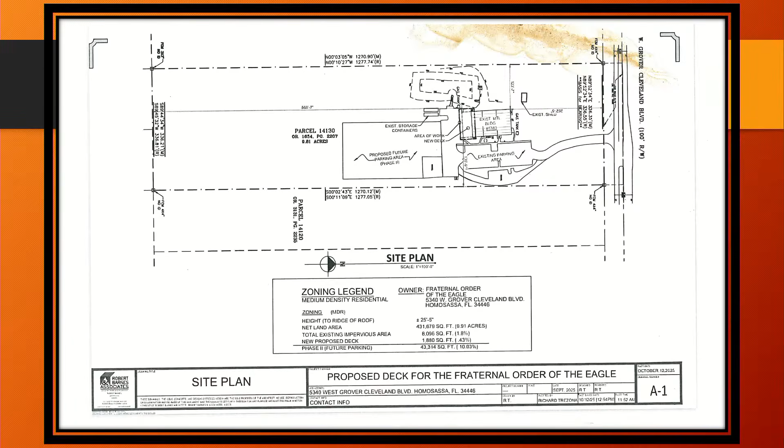Thank you. Okay, the applicant, if you can please come forward and state your name and address for the record, and then you can make your presentation. Dennis Karcher, 5011 South Pastel Point, Homosassa.

This is for the Eagles Club. We need a bigger parking lot, and that's what we're here for. Mother's Day, Father's Day, Christmas, Thanksgiving, we give free dinners out to needy people, and that's the time we need the extra parking. So we're really looking forward to the parking lot, and then hopefully we can put a deck on there.

Now, can I answer the lady's concerns, or does that go at another time? Yes, so we did have a letter from somebody. This is an appropriate time to answer. Yes, you can respond to those concerns.

Her concerns, one of the things she says is the parking lot, and that's what we're here for, number one. And then she says noise. I've been going there 6 years, and I've never heard noise coming out of the building. The best thing is on a Friday night, we have one person come and sing. We're all over 70 years old. We play songs, a little oldies, maybe a little country. But I've never heard noise, because when I'm in the parking lot talking to somebody, I can hear the road noise, but never noise coming out of the building. They all want to come there and talk about Medicare, it's not like there's loud noise.

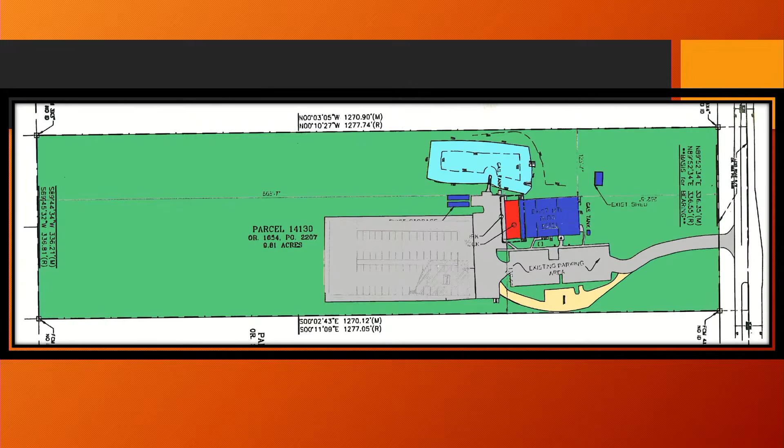Here is the site plan as proposed. You can see in red, that is the deck area proposed, and to the left there's some existing parking, but the big gray area is the proposed parking they want to add. The Crystal River Eagles Aerie was originally approved in 2003 for this use in the medium-density residential district. There was an update in 2013 which allowed an expansion to the building, which has since been permitted. So this request is to allow for the modification for the deck and the additional parking.

So this proposed use does appear to be compatible with the comprehensive plan, and as long as the conditions are followed if approved, it would be consistent with the land development code. Since this is a non-residential use, they will have to meet all the standards for small non-residential design criteria for any additions - parking lot, landscape buffers, and all that kind of stuff. Do you have any questions?

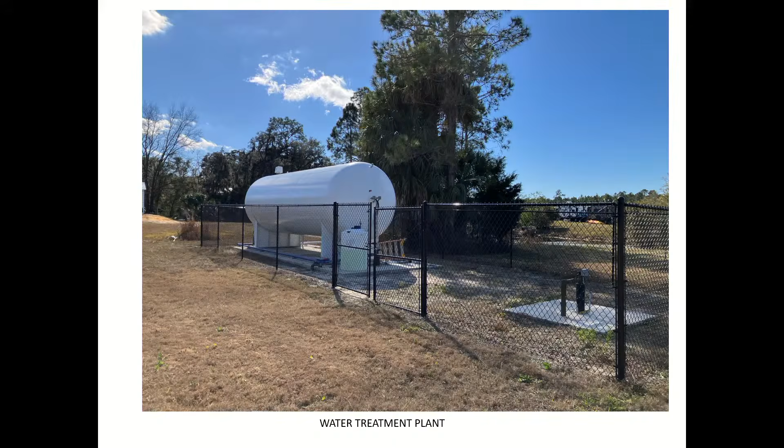That's the end. Okay, thank you.

So there have been two minor revisions to the master plan. The first was for a modification of the parking area on the clubhouse to allow for the golf carts. Also to add an entrance gate, to create a vehicle turnaround outside of the entrance gate, and to reconfigure the recreational facilities. The second minor modification was to add a maintenance building, which you've seen a picture of that.

Start with staff. Does staff have any questions of the applicant? Yes, ma'am. Mr. Furman, are you familiar with the conditions that are listed in the staff report, and do you have any issues with those? Yes, no, they're fine. I think that was my only question.

Okay, thank you. Questions by the board? Mr. Bozeman? I'm sorry. I've got a few. So you want to change the phase 3 from 55 cabins, eliminate, and then go to 213 RV sites, just to be clear. Yes, sir. What's driving that? Economics? Well, Steve Ponticos can tell you more about that.

For sure. When we first designed Stillwater, we bought the property in 2003. Excuse Mr.

Can you state your full name for the record? Steve Ponticos. I've been a Citrus County resident for over 50 years.

When we bought the property in 2003, we were going to build a land development. We were familiar since we helped develop Sugar Mill Woods. We found that piece, it was a preserve, actually advertised as Homosassa Preserve, 167.9 acres.

So we bought it with the idea of building homes. The recession and collapse in 2008 changed our thinking. We land banked it, and in 2012 we came up with the idea through my son to look at possibly doing an RV resort. We studied it.

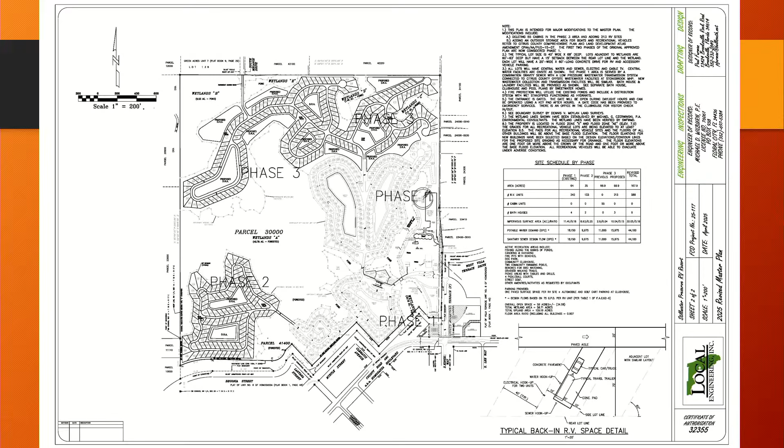So that's the answer I was looking for. I wanted to know how deep it was, how much water was there, if there's a Plan B, if there's enough to put it out. The fire marshals who came out there were right on top of it. They were impressed with the flow of the water and didn't have any questions. They used it as a training exercise. I respect that, but what I was saying is you don't have any additional fire protection that you're going to add for 213 RV spots. You haven't indicated that you needed more fire protection out there, double the size of your RVs, and that's what I was trying to get to. I don't have any further questions, madam.

Okay. Did you have any questions, Mr. Dixon? No. Okay, Mr. Stone.

I guess I would like to comment that if Richard thinks we need a soil analysis, I know that you can do a whole lot better than just fill dirt. You can give an exact composition of what that material is, whether it's sand, clay, the organic content, the granular distribution on it. If Richard really needs that, that can be made available. No, I wasn't looking for that, I was just looking for an answer. I seen the answers in the packet, I just wanted to hear the answers with my ears.

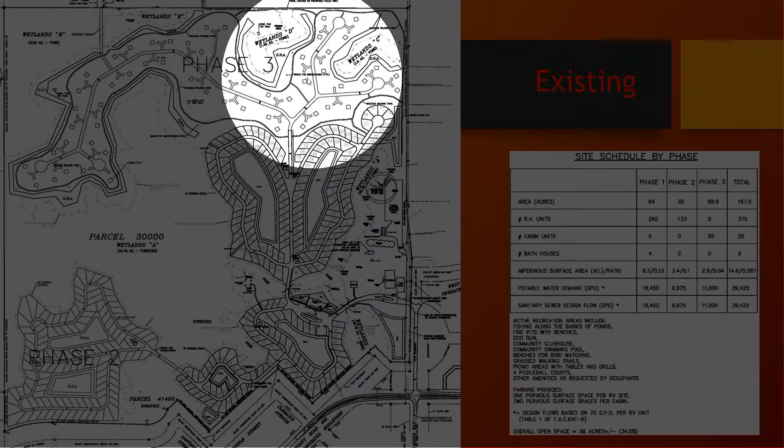Hello again, Joe Hockedell, Principal Planner. This application is being requested to modify an existing planned unit development for an RV park, Stillwater Preserve. Here you can see the existing master plan with the different phases located in it. It is partially constructed; Phase 1 is constructed right now. The portion they are proposing to modify, as Mr. Furman stated, is this portion on the north, which is currently approved for 55 cabins. They want to have 213 RV spaces.

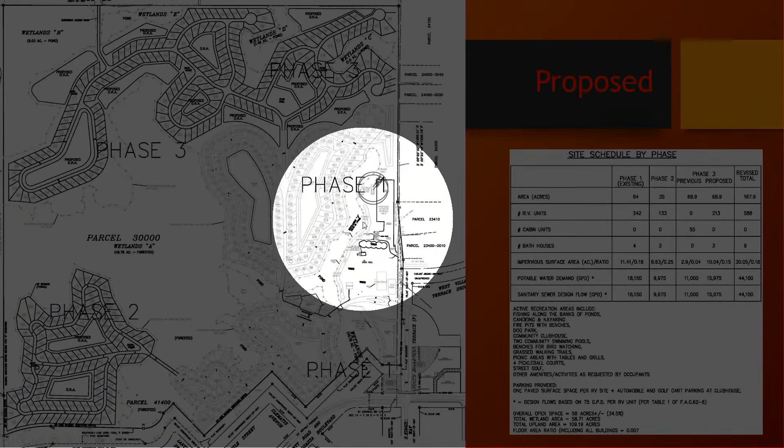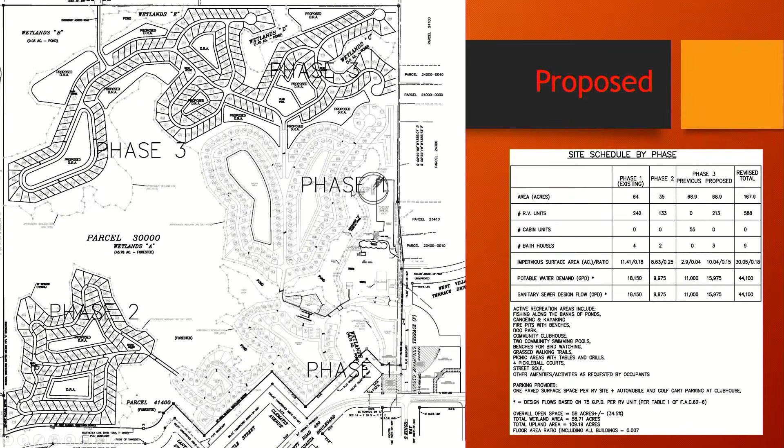The other things they are proposing as part of this, with the proposed changes, are to allow for an emergency access point here, which goes to Melanie, and to allow for the RV and boat parking area, which was not part of the previously approved master plan. So here you can see a comparison of the differences between what was approved and what they're proposing. It is an increase of 213 RVs, although if you account for the cabins, it's an increase of 158 units. According to the table on the master plan, it is a total of 588 RV spaces.

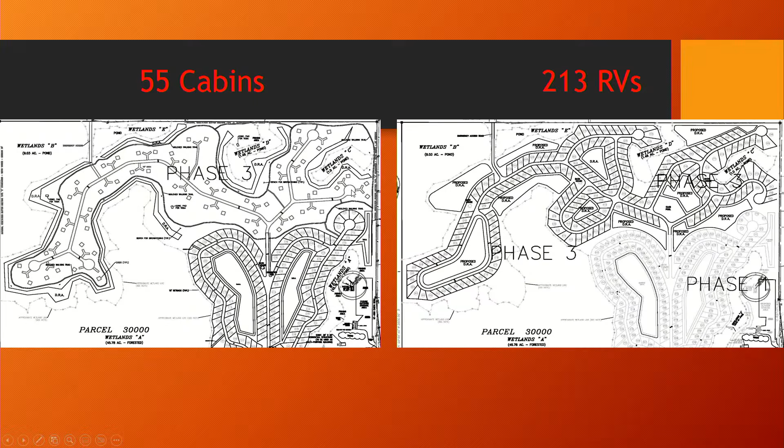I will say the park models is new information to me. That was not relayed as part of this application, that they propose to have any park models on this property, and so that's why it's not mentioned in the staff report. The Land Development Code does limit the amount of park models an RV park may have to 15% of the total spaces. If they were approved for this with a total of 588 RVs, that would be about 88 spaces that could contain park models. And the limit there is a time limit, both in Florida statute and the comprehensive plan, for how long a camper can stay in an RV park, and that is up to 6 months.

One thing they are going to have to address as part of this is they do have some unpermitted signage in the right-of-way of MacArthur Terrace and Homosassa Trail. These signs will have to be removed as they cannot have these in the right-of-way.

But the conversion of the 55 cabins to 213 RV spaces does appear to be compatible with the park as it exists right now. They are not requesting any deviations as far as design criteria. As Mr. Furman stated, they will have to meet all the requirements for an RV park as part of this, if it is approved.

There were a couple items that I was going to request to modify in the conditions. One would be to get some clarification for condition number 4. Currently it says that the RV and boat storage is only for campers occupying the park. Based on Mr. Ponicos's testimony, it sounds like he would like to modify that, so that's something I will request some clarification on at some point.

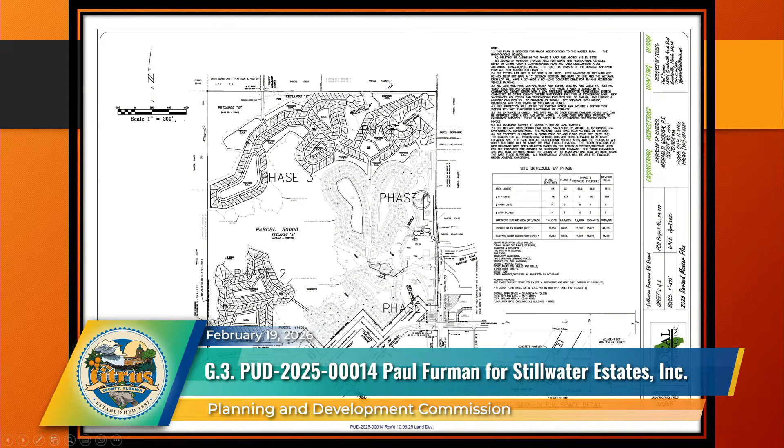Could that be on the north side where the RV sites are as it abuts the residential? Because there is, yeah, I mean, there's some wetland areas in there that will have to be maintained, but Joe, I know you know this off the top of your head, type C is 15 feet, type D is 25 feet? Yes, with a wall. Yeah, type D includes a wall.

So I would be in more lines of a type D buffer with or without a wall, just to buffer the trees. I'm not sure if the residents would like to see a wall, but they would like to see trees instead of a park, as one of the residents have spoken on. So we can change condition number 3 to a type D buffer. I would enjoy that. Yeah, I would support that as well, and I also like the wall. I think it cuts sound, as well as unpleasant visuals.

Yeah, I concur. Mr. Shara, did you have any further? Well, I'm in support of the residents' requests that they don't see this facility to the greatest extent possible. So what I'd heard the applicant say is there was going to be a 10-foot berm. I don't know if that's in writing, so we can't rely on that. So we need to put it in writing. The 10-foot berm is on the east side, next to MacArthur, and I think something similar to that with the vegetation would go a long way towards letting these folks enjoy their quiet, well, at least enjoy the vision.

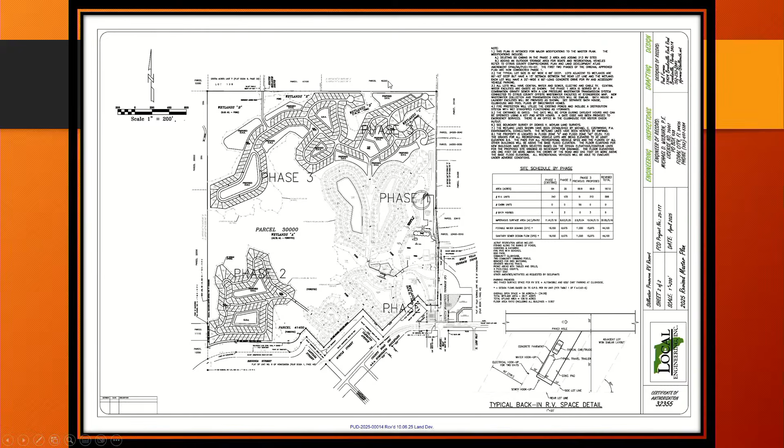True. So we can have a condition with that - if the existing, I think a little common sense needs to be realized. I think it needs to be stipulated that the berm is preferable, but if there's existing dense vegetation that does the same thing, then it would not be appropriate for that place. Yeah, it's in their best interest to be good neighbors.

Yeah, of course. Madam Chair, I have a follow-up, and I overlooked it. I think I might have been premature in my comment of support. I'm still confused with where we stand with this RV boat storage.

We know that 6 months - we've now defined 6 months as the longest stay, 180 days. The way this is worded now, it would be RV and boat storage for those residents, and you could infer while they're there in the park. The applicant has made a specific request that could be - their intent would be to store RV facilities for their customers while they're not on site. So I don't think we've resolved this one yet.

I need to come back and we need to chew on this one. My position is I feel right now it's premature. We've had additional information that came in. I'd like more information on exactly the park models and where they're going, and I'd like to see staff's analysis. Also, being that it's in the CHHA, I'd like analysis on evacuation and, just like you said, what do you do with the stored ones? Do they have to remove the ones that are there?

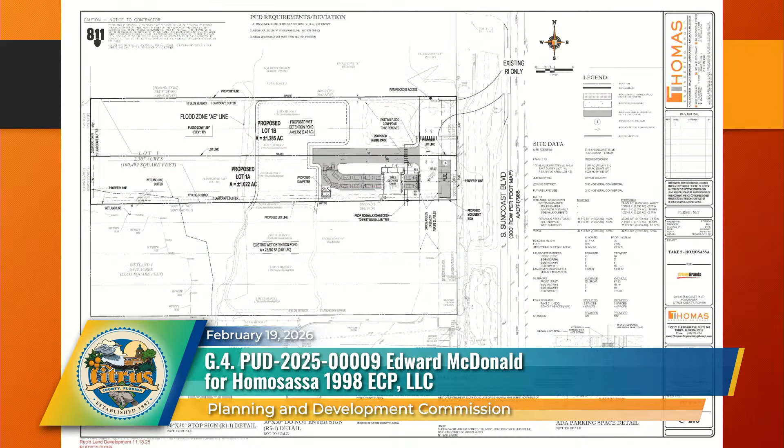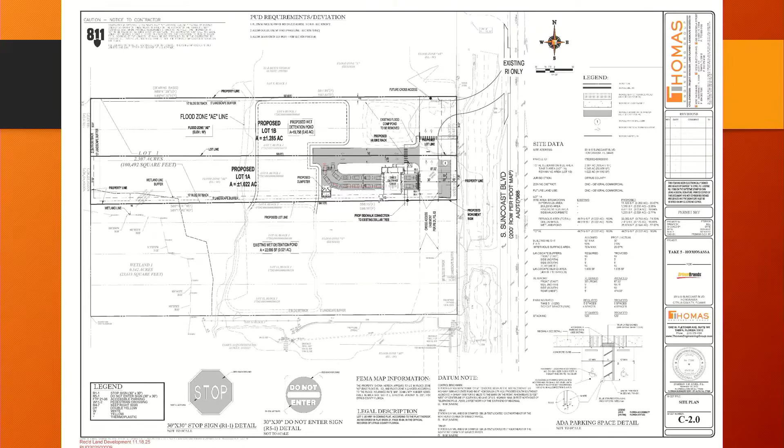So part of the deviations requested in this application is that the minimum width, which I believe is 150 feet per the subdivision, be allowed to be 70 feet in width. That way we can subdivide it. The developer can sell this portion to Take 5, and leave the remaining portion to the north, which right now he's not sure what he's going to do with.

So lot area, very unique — floodplain in the back, wetlands in the back, keeping it. Dollar Tree was already permitted and approved, extend the stormwater pond up. The cross access was established during the Dollar Tree, so essentially from the Circle K to the south, which recently did a...

improvement for some diesel truck parking on their portion right there. You can kind of see the curb line. That's been in place for, I think, 2 years. But they provided cross access. We extended it as part of the Dollar Tree.

All the way to the north, we have a permitted right-in only with FDOT. And that cross access should be extended even further north, which there's an application by a different firm and a different developer, I believe for a Waffle House directly to the north. There would be a portion that's undeveloped between us and our North Lot 1B, but it would continue that cross access, which would be ideal for traffic, and that's what FDOT is looking for.

So access is taken care of. Cross access is already established per the plat. Parking's in place per code.